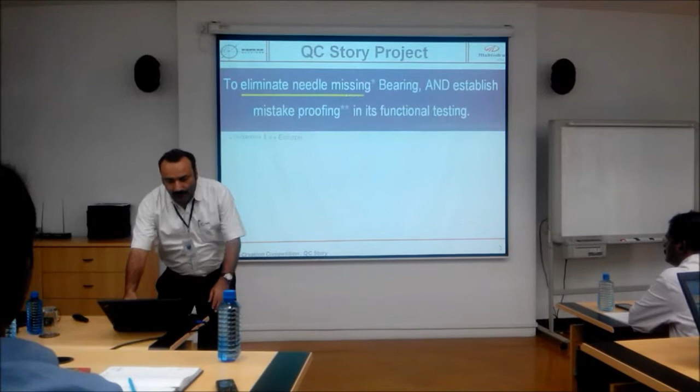Now, coming to our problem resolution presentation, our project title is to eliminate needle missing bearing and establish mistake proofing in its functional test. We call it single piece flow robust 2A line.

Our team, I am S.A. Khan. Three of us are present today, Mr. Ravi Shankar, Mr. Kumar. This was the complaint we received: one roller missing from the bearing. See the defective sample picture below, between the two yellow arrows, needle missing.

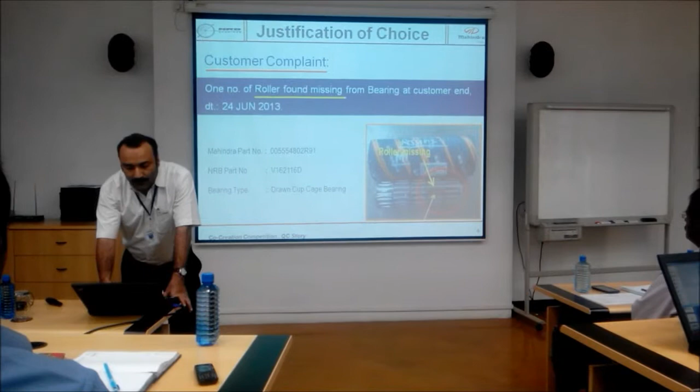This is our existing process flow. Station 1 is the bearing assembly. Stations 2 to 5 are the functional testing.

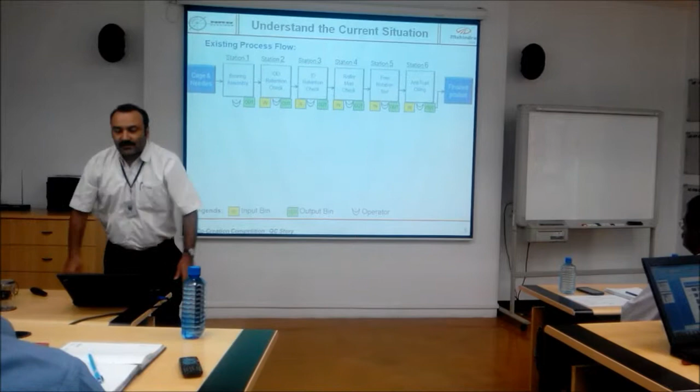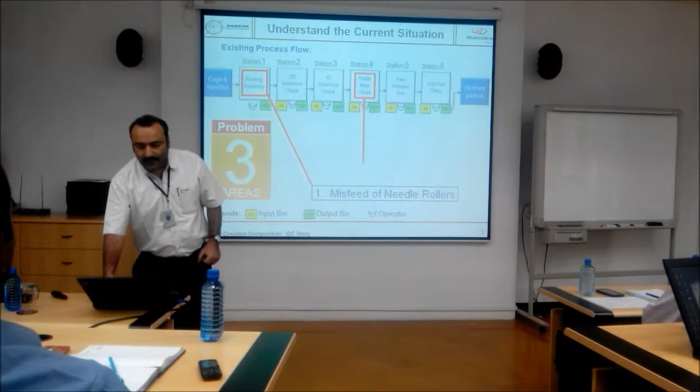We identified three problem areas. The first was the bearing assembly, where misfeed of needle rollers was occurring. Second is station 4, where there was no POKA-YOKE for needle missing bearing. And then the batch production - you see the number of bins for collecting input and output. We also revisited the design.

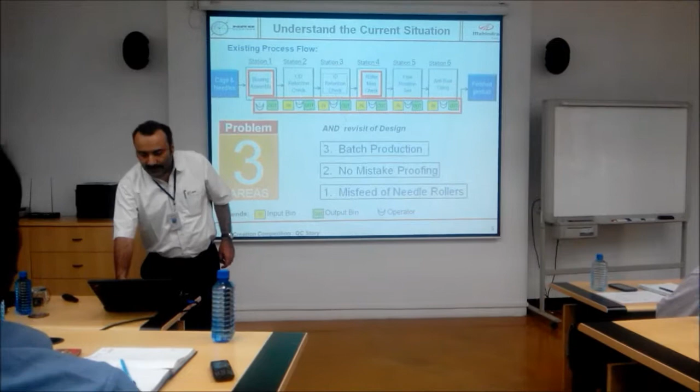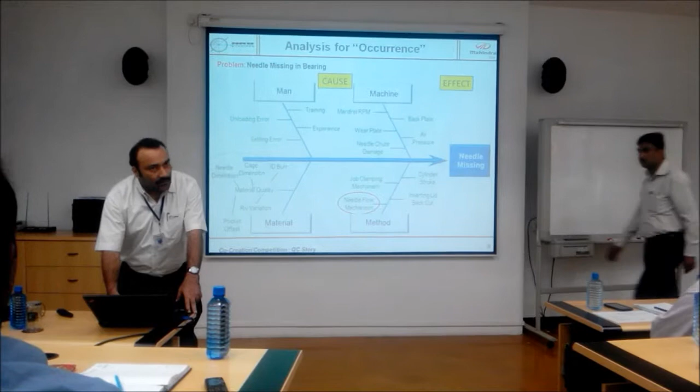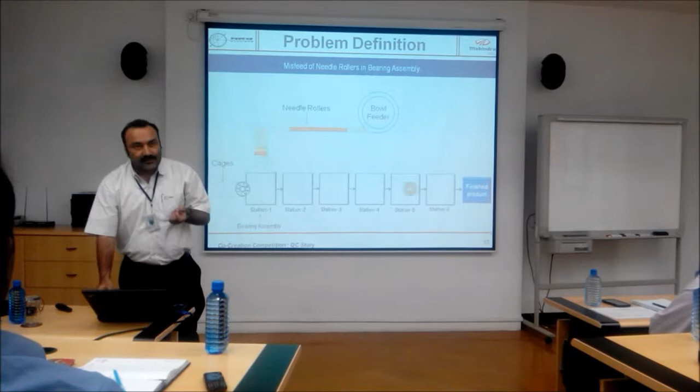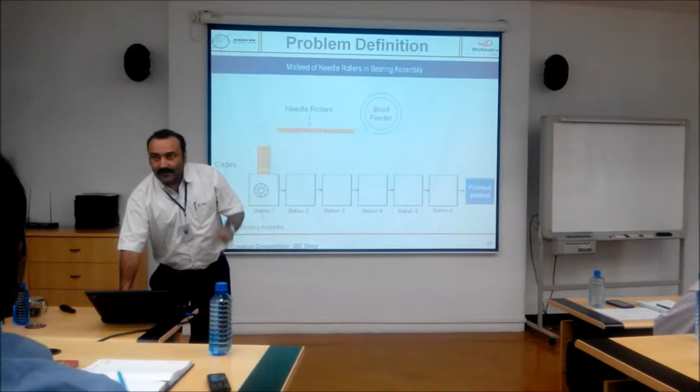Our analysis zeroed on the needle flow mechanism as the cause of the defect. The root cause was that the needle guide design itself was such that the misorientation of the needles was not prevented. See the cages coming from the left, needle from the top, getting inserted, bearing assembled, and moving to the functional testing. But once needle misorientation occurs, there is every chance the very next bearing may remain partially unfilled, hence a case of needle missing bearing.

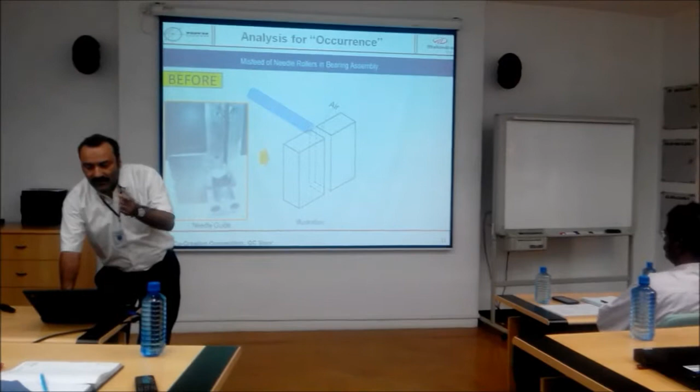In bearing assembly, needles reach the bearing through a needle guide. It has a rectangular cavity which doesn't prevent the needle from changing its axis, hence a vertical needle, as seen in the right picture.

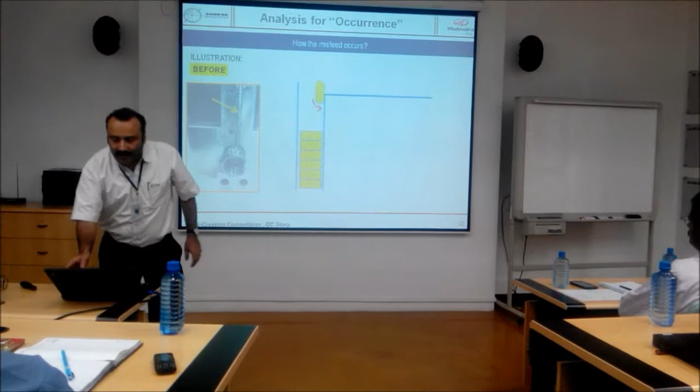At plain sight, it looks very simple - the needle moving along its axis, dropping laterally. But if you see the dynamics of the needle movement, the moment half its length crosses the plane, it has a natural tendency to tilt due to the law of gravity, and hence the needle becomes vertical.

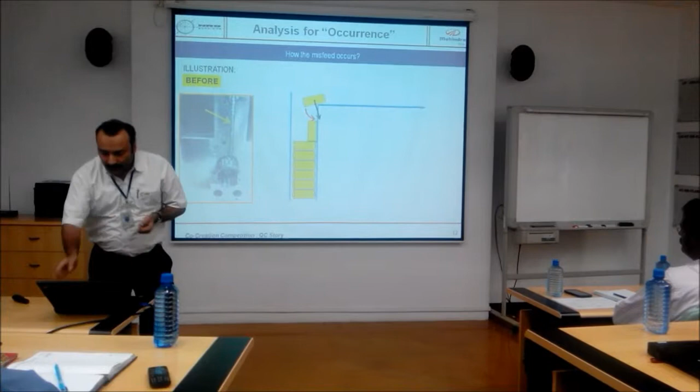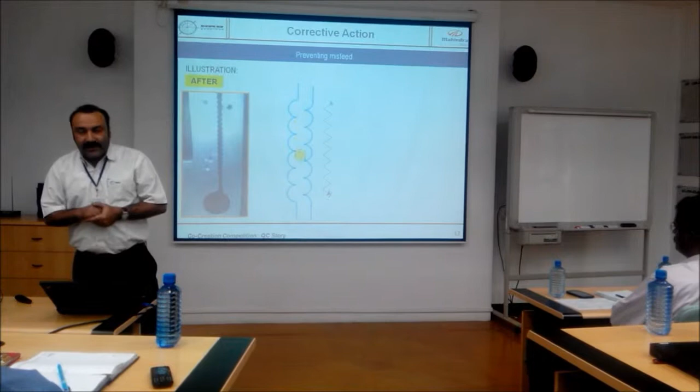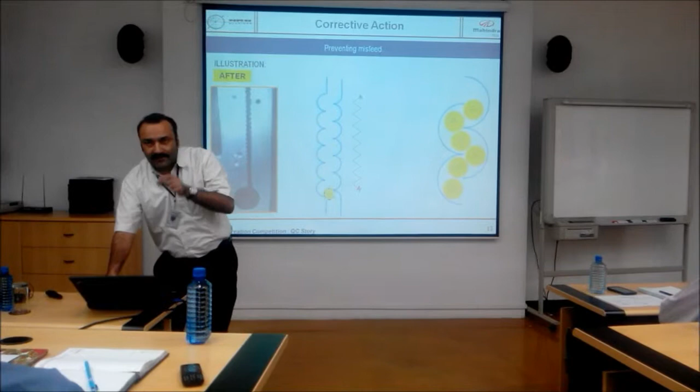We took various trials altering the needle guide design. One of them is like this: it can be imagined as two half cylinders face to face but staggered, giving a zigzag motion. You can see the magnified geometry on the right. The successive needles, if we join their axes, are not collinear, so the needle has to twist somewhere to become vertical. This way we completely arrested the needle from becoming vertical.

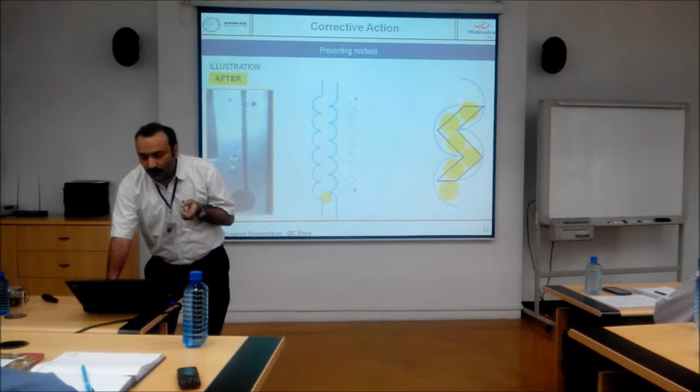But we could not go ahead with this from the productivity point of view. After 800 numbers, we found that the edges were getting damaged.

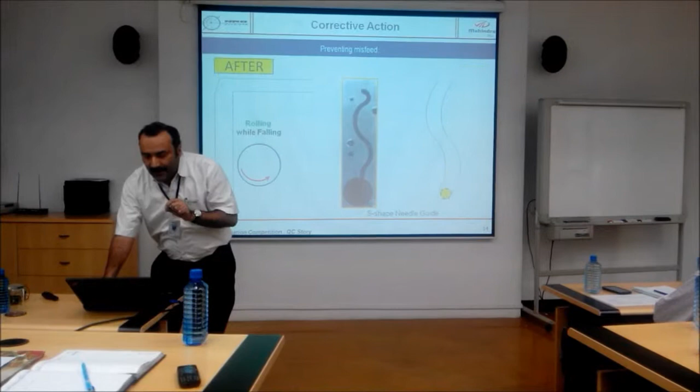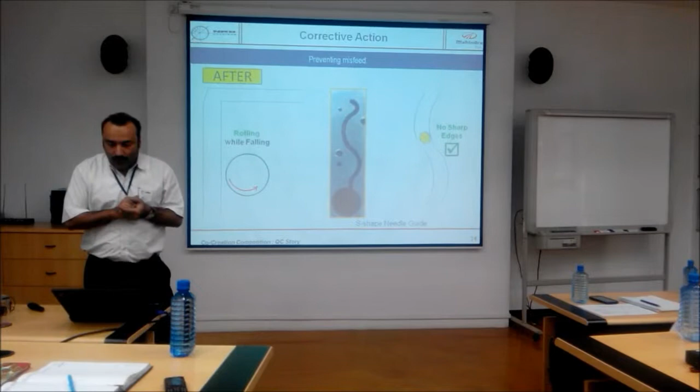So we thought, if we make the needle roll along its axis, its axis will always remain parallel to the ground. So we designed an S-shaped guide where the needle flow is very smooth and the needle rolls along its axis, so it will always remain horizontal to the ground. This way we completely eliminated the needle misfeed issue.